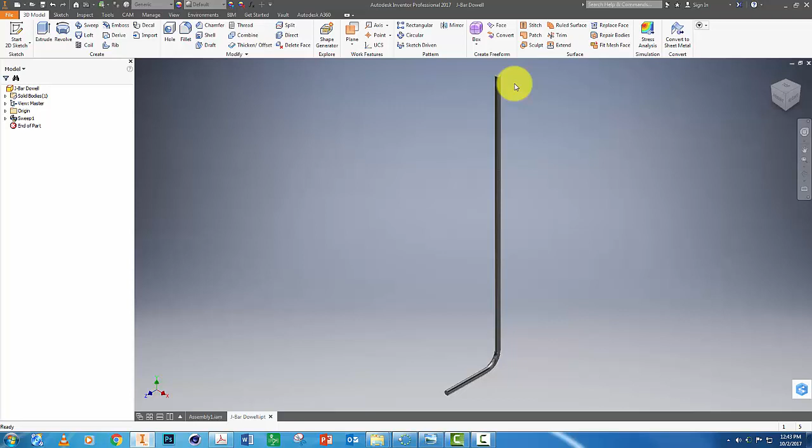Here is a model of an L-bar shaped piece of rebar. This is what we'll be putting in the footings next. Before we do that, let's take a look at our plans. Let's look at view B8, which will show us this part of the house.

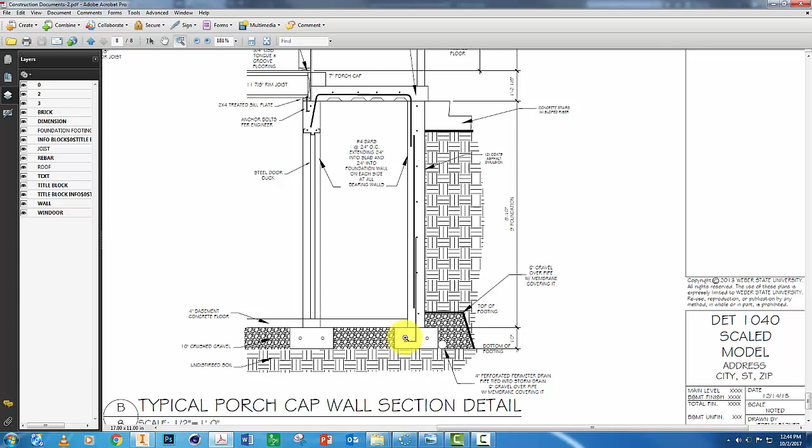Here it shows a foundation wall. You can see the L-bar is placed so that the L is tucked underneath one of the pieces of rebar in the footing. Often L-bar rebar is put into footings just after the concrete has been poured, and then they're straightened.

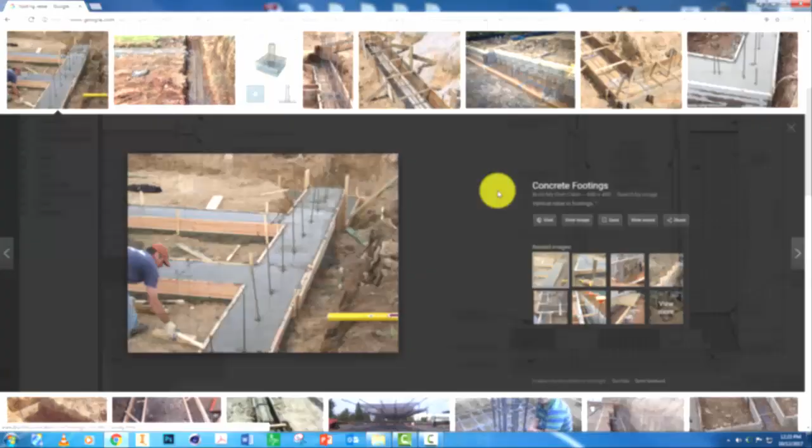The notes say that the footing size and the rebar will be determined by an engineer. Elsewhere in this plan set there is a table that shows several different scenarios, how closely spaced those pieces of rebar need to be. The size number 4 rebar is shown here. There are also special considerations around openings, which in other words are windows and doors in a foundation wall.

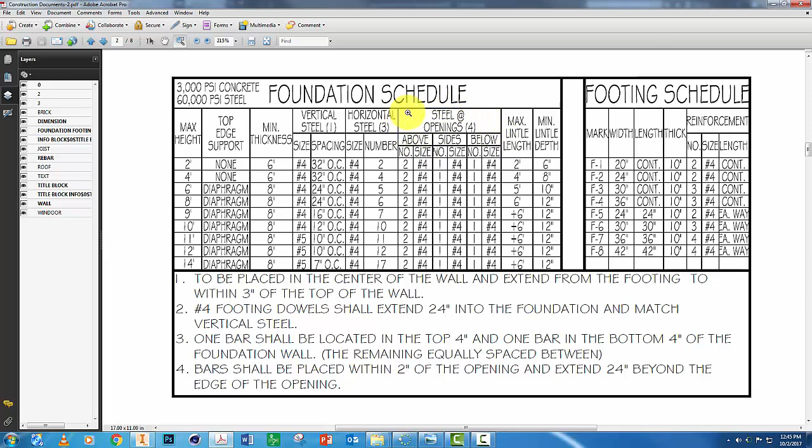Let's jump back to the section view. This plan says that this wall is 8 foot 10 inches, or in other words close enough to be regarded as a 9-foot foundation wall. Many residential homes have walls that are 8 feet tall. By the time you add the concrete floor here that's 4 inches thick, you end up with a ceiling height that is less than 8 feet. So this taller wall gives us more comfortable ceiling heights in the basement.

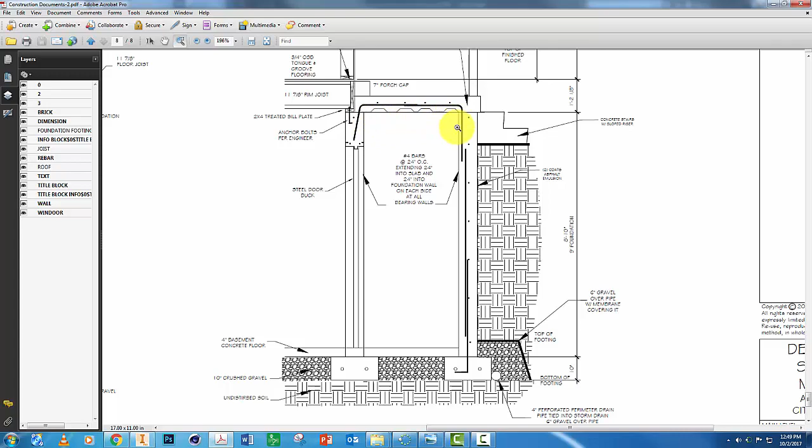If we jump back to our chart, it says for a wall with a maximum height of 9 feet, this is a concrete foundation wall, and an 8-inch thickness, we need to use number 4 size rebar, and we need to space it 16 inches on center vertically, and we need to have at least 7 horizontal pieces of rebar spaced equally in the wall.

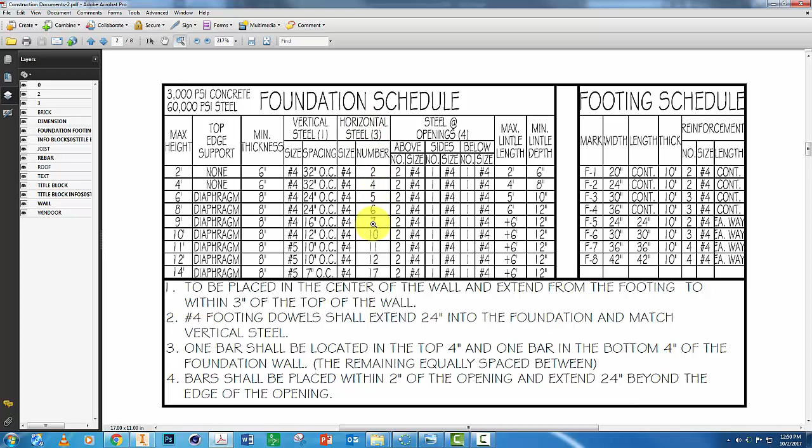Here's an example in Inventor of vertical and horizontal rebar in one of the walls in our model. It'll be a solid wall, no window or door in it. But this shows how it would look. When rebar is installed, it's tied together with wire ties.

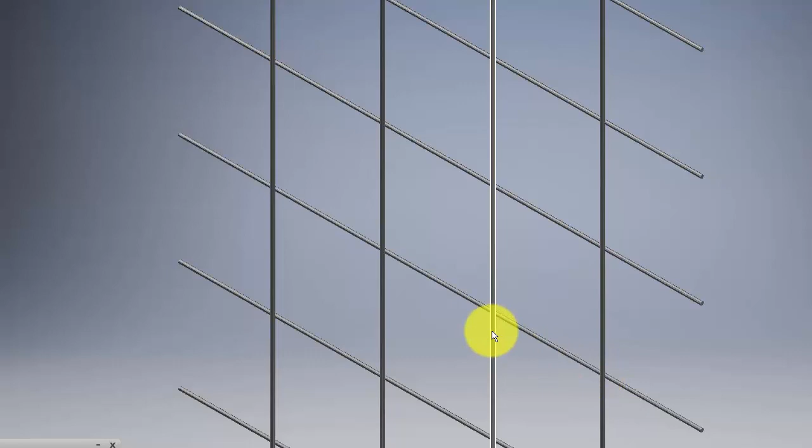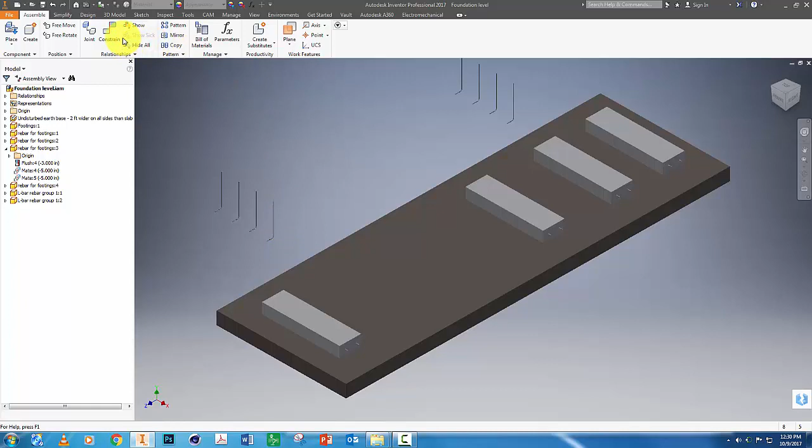With your foundation level assembly open, go to Place and find the file called L-bar rebar group 1. This has 4 pieces of rebar spaced 16 inches on center. Let's place 2 copies of that in our assembly and press escape. To assemble the rebar, let's go to Constrain and start by zooming in and selecting the center line of the bottom of the L-bar and place that on the surface of the footing.

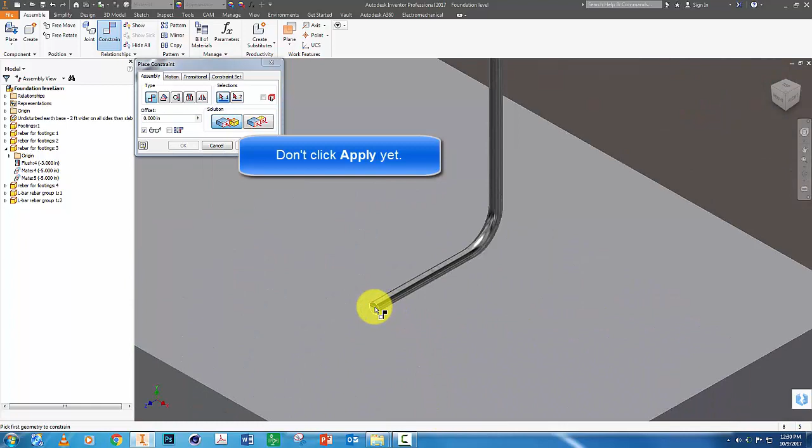If you zoom in, you can see that the center of the rebar is on the footing. It's halfway sunken in there. We're going to send it down even further. The footing is 10 inches tall, so let's drop it about 5.5 inches. So we'll type 5.5 on the offset, and it looks like we need to make that a negative. That will drop our rebar into the footing. Click Apply.

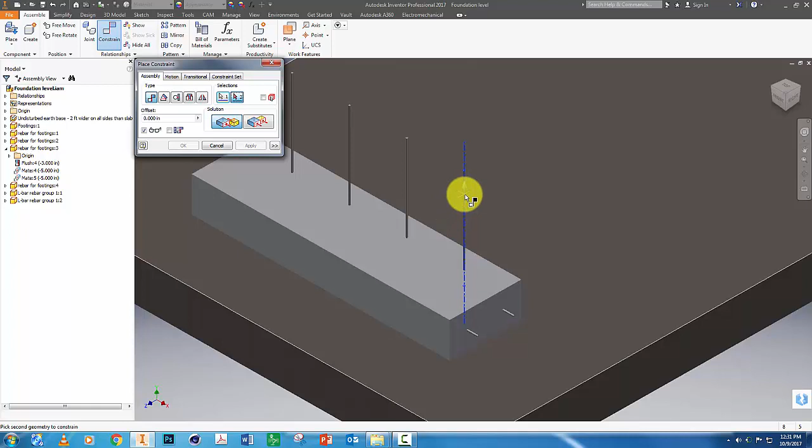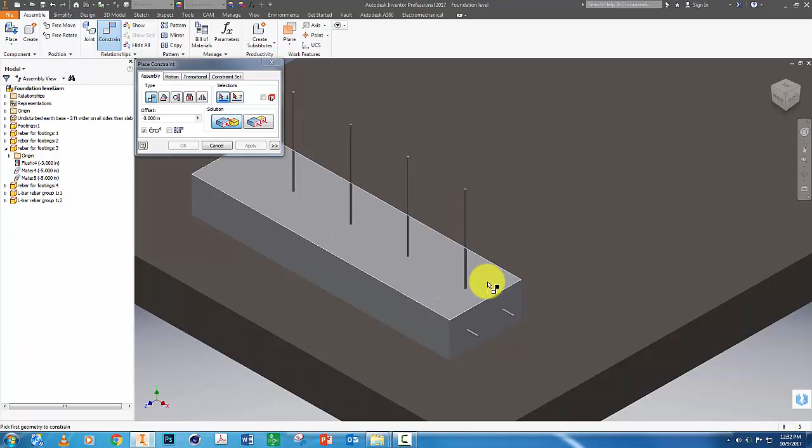In our next constraint, let's center the rebar across this dimension of the footing. So we'll select the center line, we'll select the side of the footing. Our footings are 20 inches, so let's type negative 10 inches and click Apply. Let's center it across the long distance of our model footing here. Select the center line, select the side of the footing, and a value of minus 14 inches will work here for this particular footing, and click Apply.

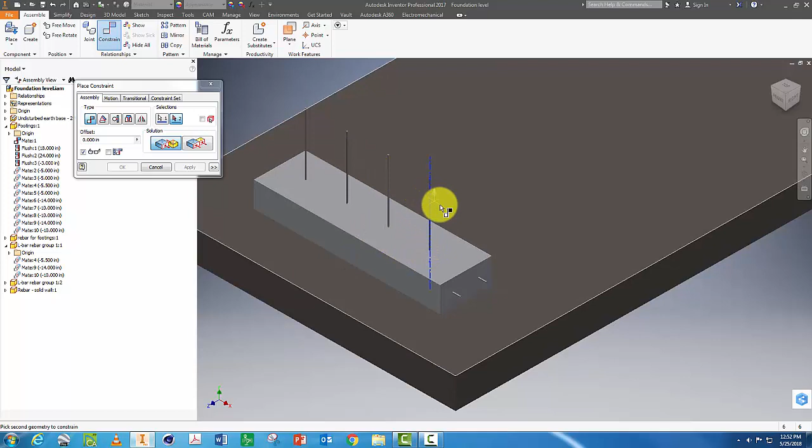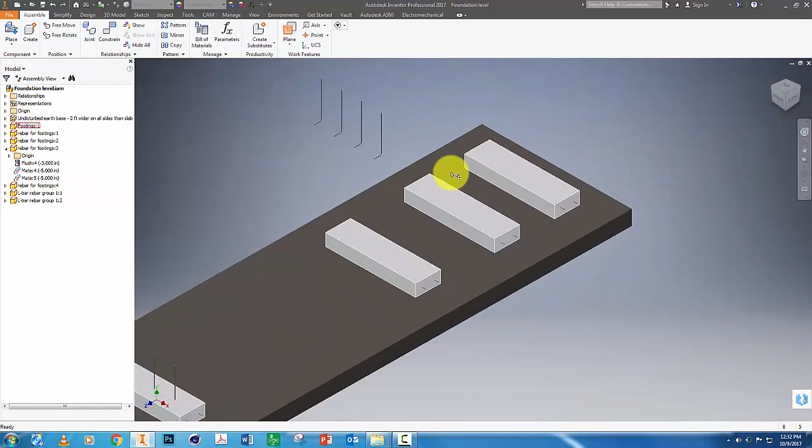And even though the L-bar looks like it's lined up straight, we need to add another constraint to this other side. So I'll press escape, click Constrain, click this other side, L-bar rebar, click the front of the footing, and enter -10 inches. Click OK. And now let's place the rebar on this footing over here. This one's a little bit different at the end, so I'll walk you through the steps again.

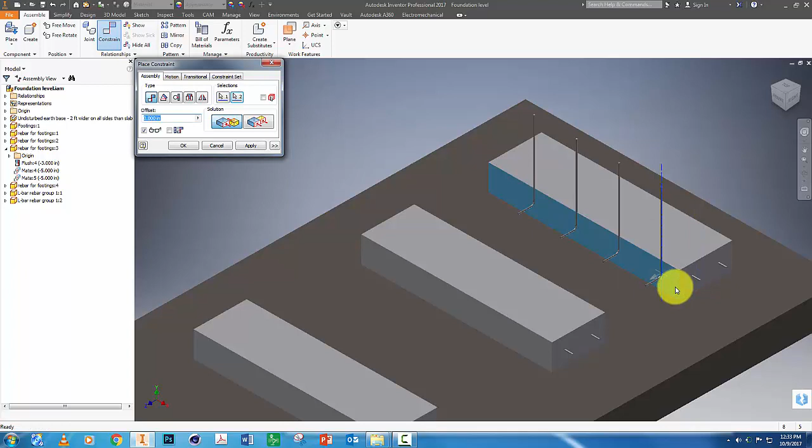Constrain, click this center line, click the top of the footing, and enter -5.5 to drop it down in. Hit apply. Then select the vertical center of the L-bar right here and center that by typing -10 inches. Click apply.

And then this is the part that's a little different. For our model to work out correctly, constrain these sides together and then type -12 inches. Click OK.

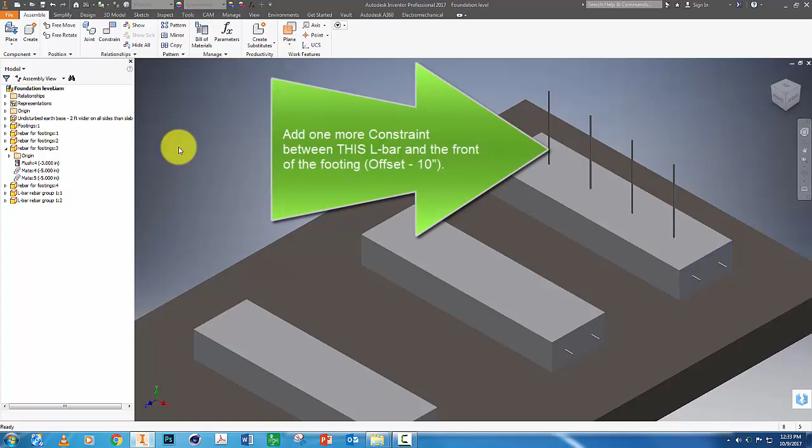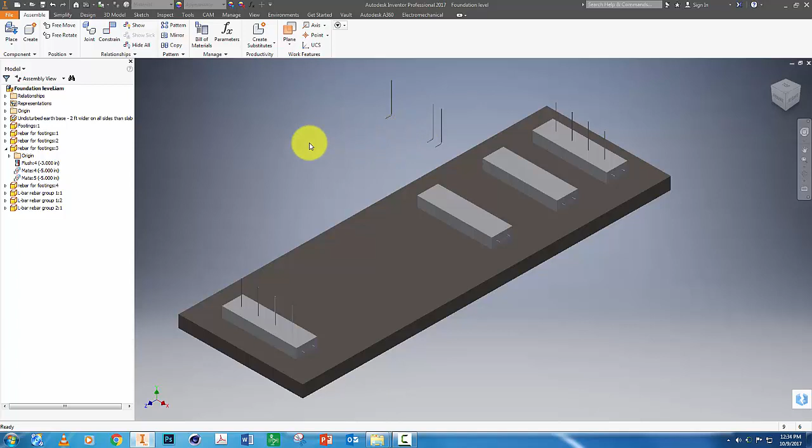Now let's add a different configuration of L-bar rebar to this footing. Go to Place, and this is L-bar rebar group 2. Place one copy of that. Press escape. This is different because we're going to have a doorway here, and we don't want rebar there. We have to have a door. Constrain this in the same way that we did this configuration here.

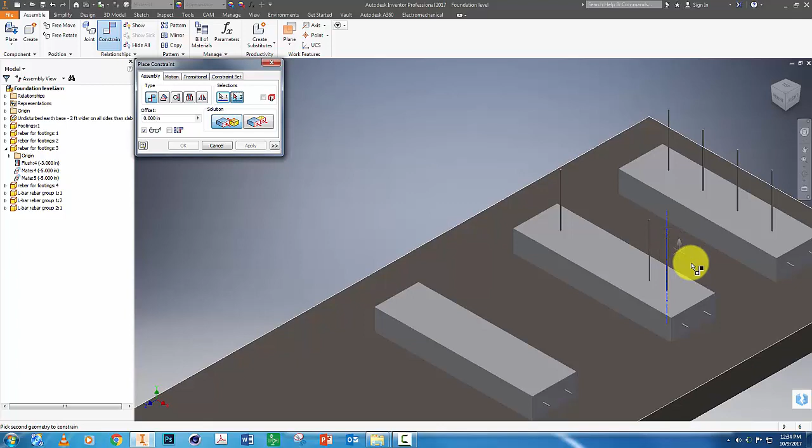Let's start like this. -5.5. Apply. Center line and this surface. -10. Apply. Center line and this surface. -10.